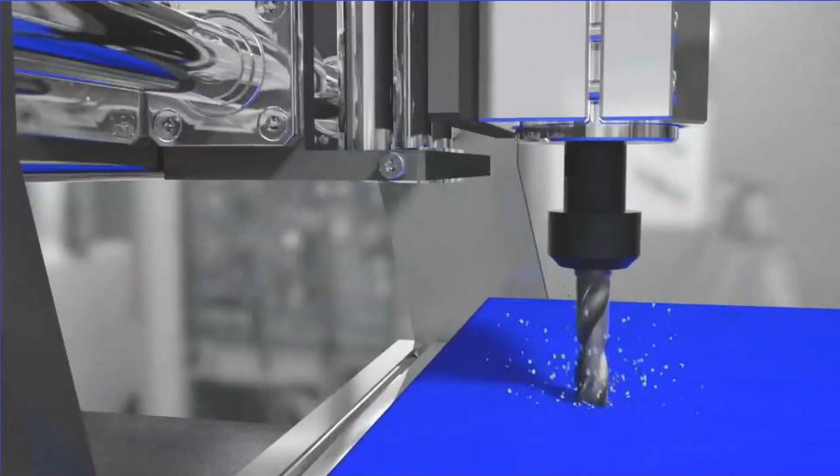I'm here to present Defeating Machining Challenges webinar number 3 with a focus on ToolConnect. The roadmap, really, I'm just going to give you a brief high-level PowerPoint of ToolConnect and its capabilities. Then I'm going to give you an on-machine demo. If I do have time, I want to mention one of our other products called SmartLight.

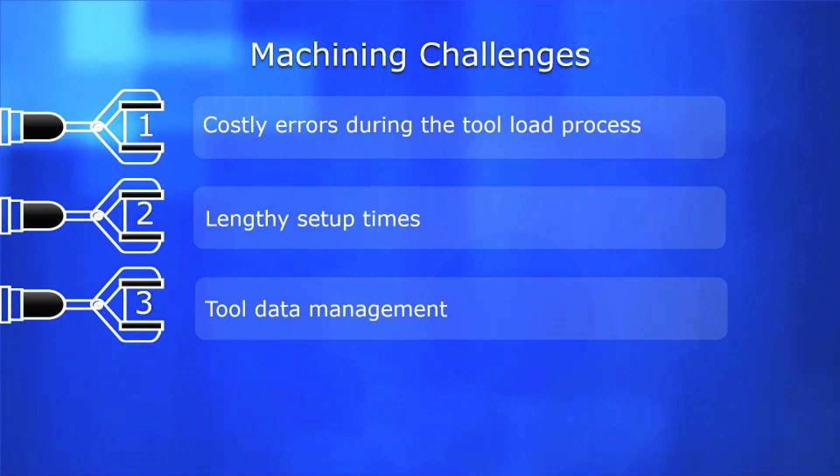So let's identify some machining challenges. Number 1, creating a tool load and unload procedure that is uniform to eliminate error. Number 2, we want to reduce excessive cycle time from on-machine tool measurement. In addition to that, we also want to eliminate costly errors during setup and optimize uptime of the machine. 3, tool data management, managing that tool data in and out of a centralized database from the machine.

And finally, our current climate. I mentioned this last week. What's next on the horizon with all of COVID-19 happening? Word on the street is reshoring is coming back to the United States. Manufacturing is coming back to the United States. The lowest entry point cost-wise to satisfy orders is for customers to optimize their current equipment.

Also, with these customers, did they have to let go of their skilled operators? What's it going to be like backfilling those positions? Relying on technology, intelligent solutions to keep machines up and running and error-proof the process is imperative.

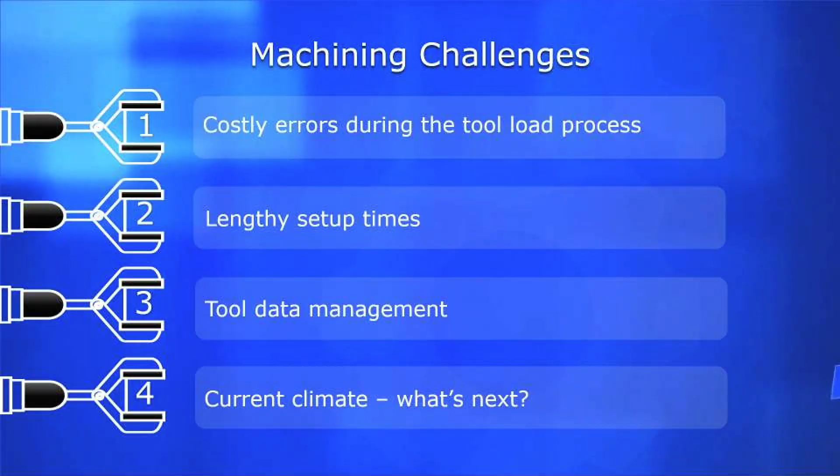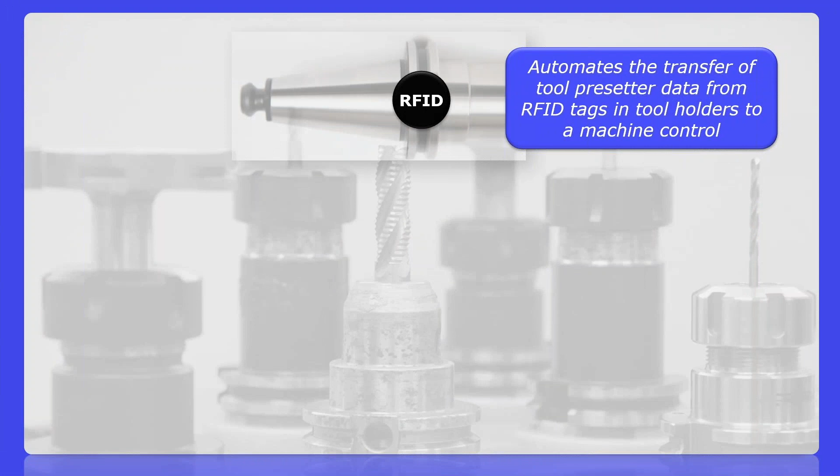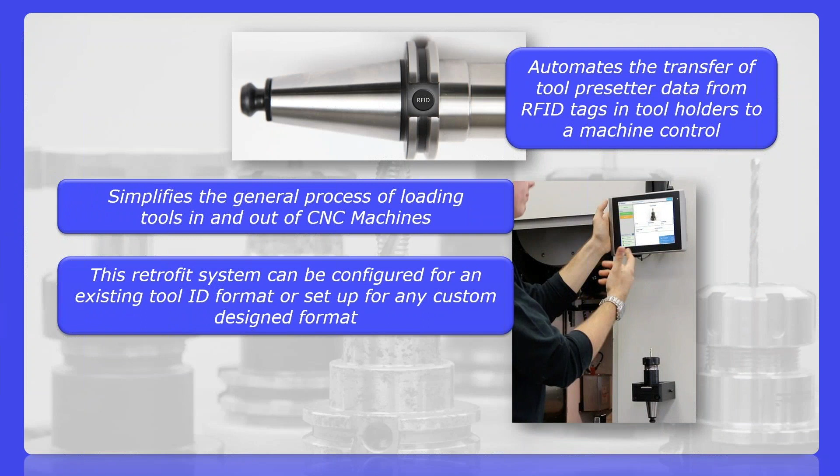I want to introduce the solution. ToolConnect is an RFID tool management and identification system. Really, all ToolConnect does is automate that transfer of data from the presetter to the machine tool controller, utilizing an RFID tag as the data carrier. It simplifies the general process of the loading of the tools in and out of the machine. It's a fully retrofittable system. It can be configured to match existing tool ID formats or set up for any custom design format.

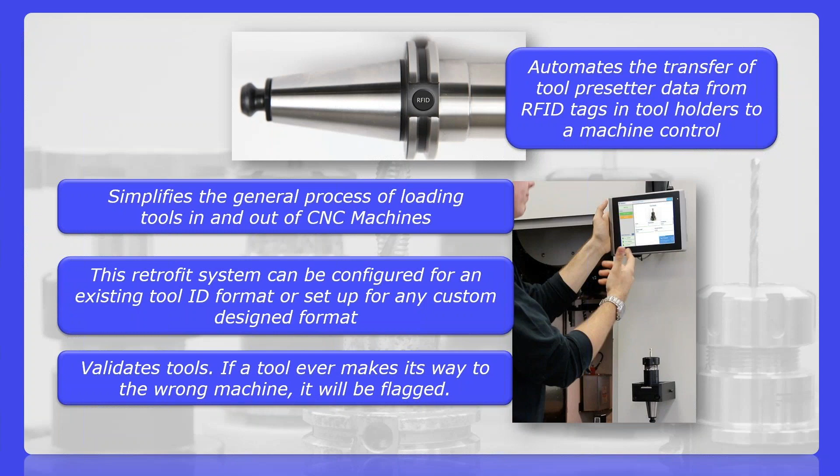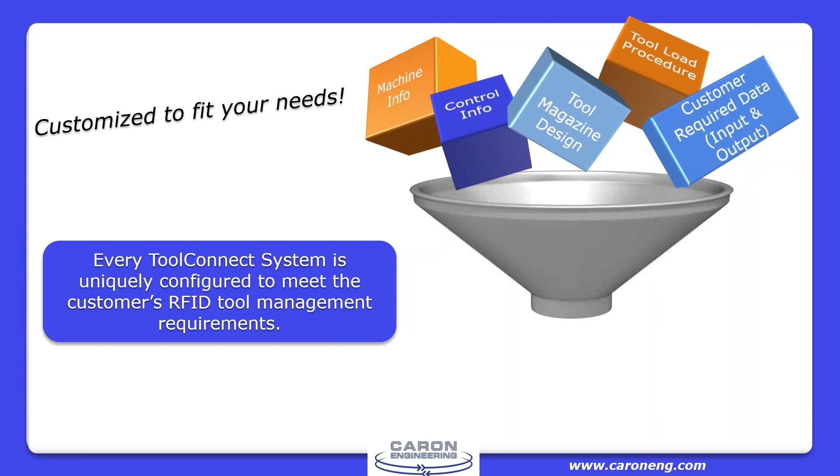Finally, it validates tools. So if the wrong tool is trying to be loaded into the machine, it will be flagged and prevented from going in. It's 100% customizable to fit your needs. So we compile machine info, control info, magazine type, tool load procedure, all these requirements of the customer on the tool load and unload procedure. We compile all this and we create a customized ToolConnect system for them. It's customized, but it's the same UI across all machine types. So now operators don't have to learn how to load tools in different types of machines.

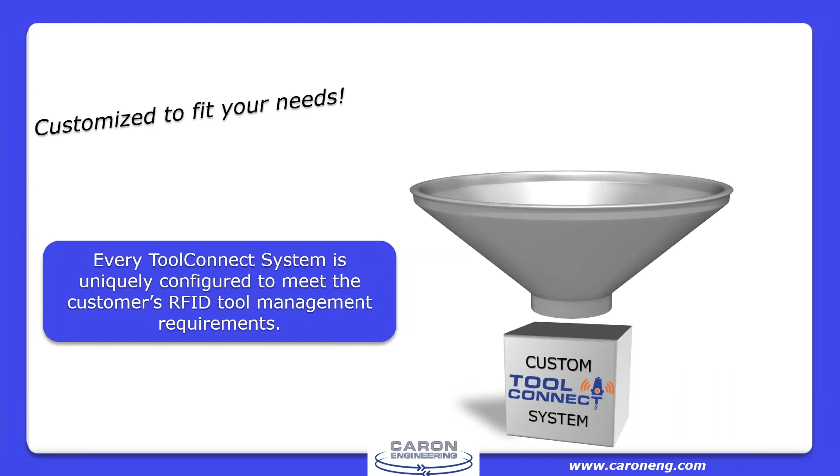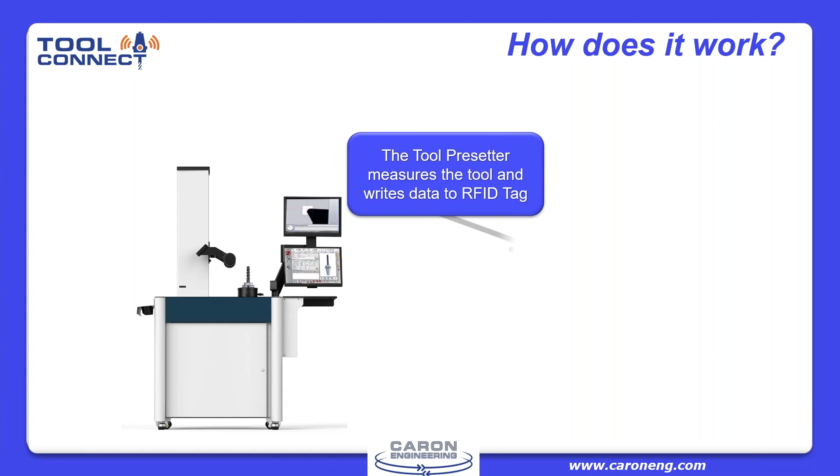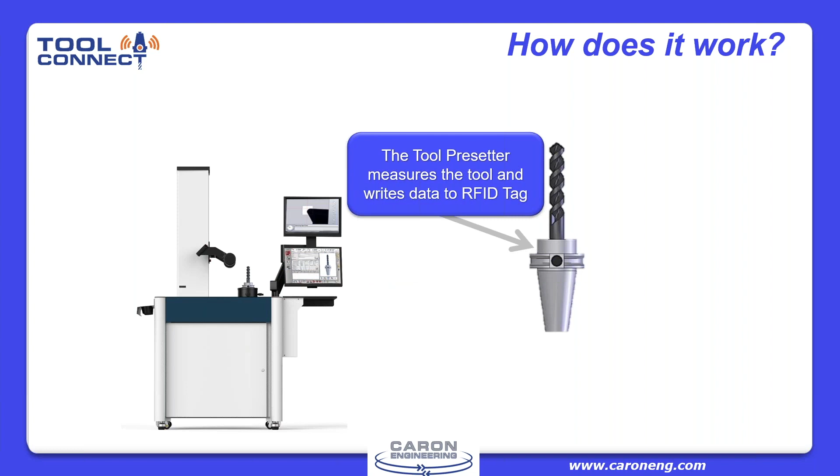So how does it work? First and foremost, you have to implement a tool presetter. Now the tool presetter measures the tool and writes all that data onto the RFID tag. Things like pull stud type, max RPM, tool too large for adjacent tools in the chain. You can get pretty elaborate with the type of information that goes on the tag.

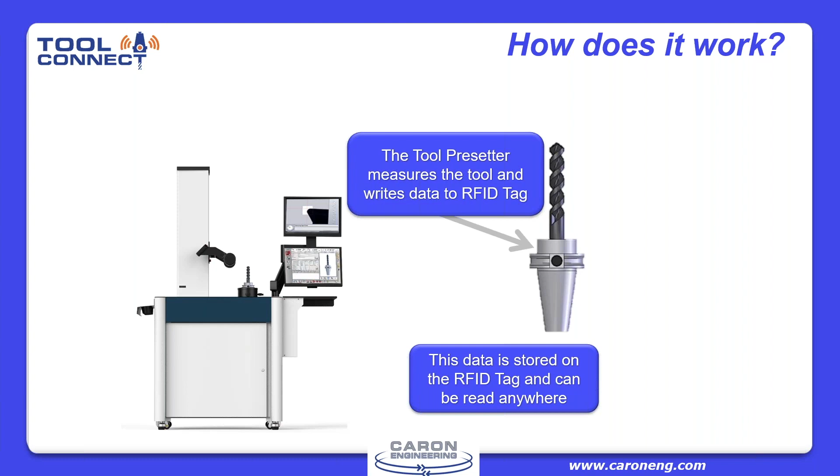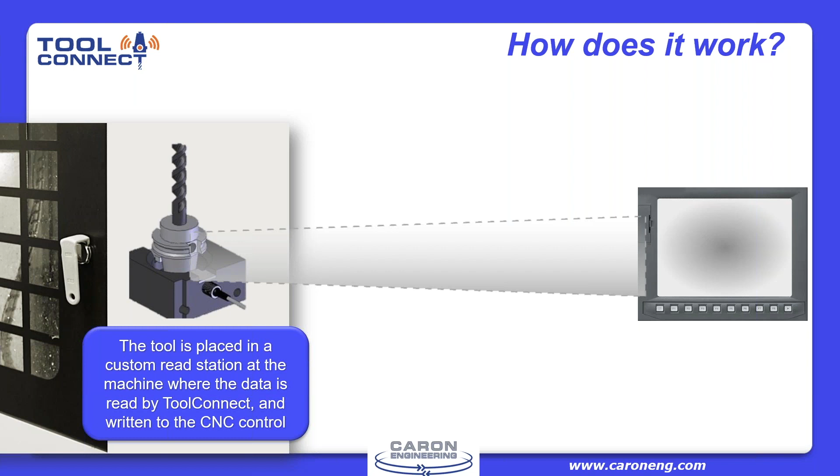Now, once that data is flashed to the tool, the data is stored and it can be read anywhere, any machine. So once that intelligent tool is placed in a custom read station, which is actually designed by us to accept that tool holder and present the RFID tag, the data then can be read by ToolConnect and written to the CNC control automatically. After you're done machining, ToolConnect tracks tools removed and updates tool life information to the tag. So your tool life, your tool wear offsets, the number of tool changes, etc.

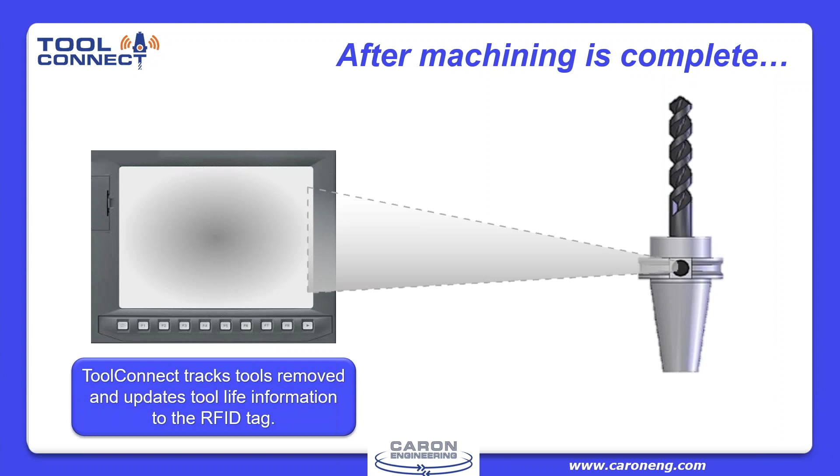So if the tool isn't used to completion, we can then take the tool out and load it into another machine. If the tool is at end of life, however, you then can take that data and plug that tool back into the presetter where there's an online repository, a database, and extract all that data off the tag. This is Industry 4.0. This is being able to culminate all of that data that you probably hadn't had the option or access to get before.

Here's our simple user interface that allows the operator to view all the tool and process information. Here's an example of some of the things that you can include: tool picture, ID and description, geometry, the status of the system, if you want to select an ATC location, and other user-defined custom features.

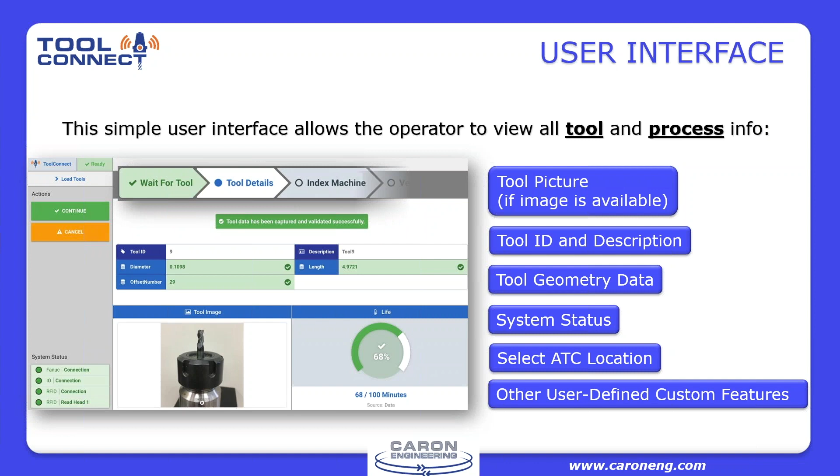Now, I'd like to go into our live demo. Mic check. Guys get that? Mic, checking the mic.

It's a good one. I want to start first by showing you our versatility of where we can mount the tag. In this example of this BT30 tooling, we actually put the 4mm RFID tag directly in the pull stud. In other examples, like this smaller tool, we actually are putting it in the keyway slot here. And yet a further example of that would be this HSK25 tool, where we actually put the RFID tag underneath the base of that.

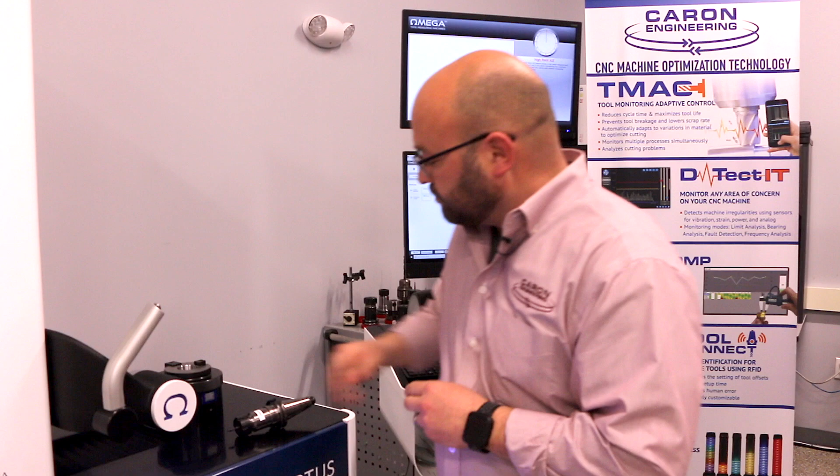What I'm trying to show you is that it's a versatile tool. It's a software and hardware solution that is truly customizable to the customer. A more common type of application and scenario would be on a Capto, for example, where the RFID tag goes into a milled out slot that most tool companies already have in there. So the RFID tag is in there.

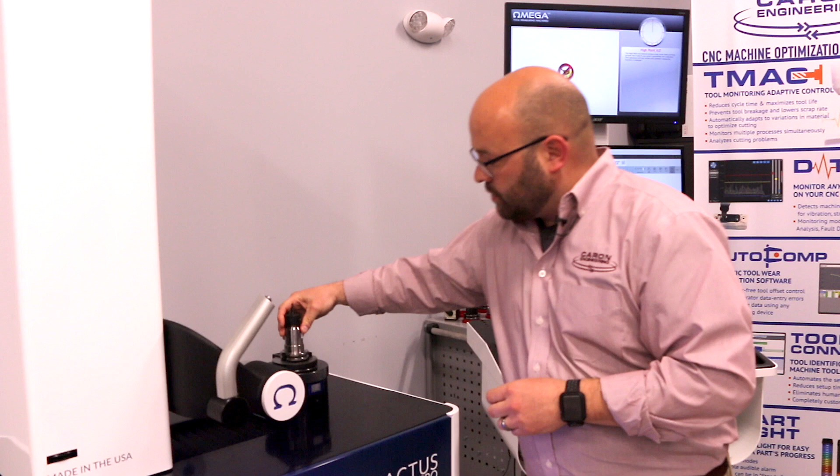Now what we're going to do is bring it over to the presetter. We're going to mount it in its position. I'm going to come over to the HMI, click Load, Tool RFID. A wand is going to present itself. It's going to train itself in, read the unique identifier on that particular tag, which is then going to tell the presetter how to measure that particular tool.

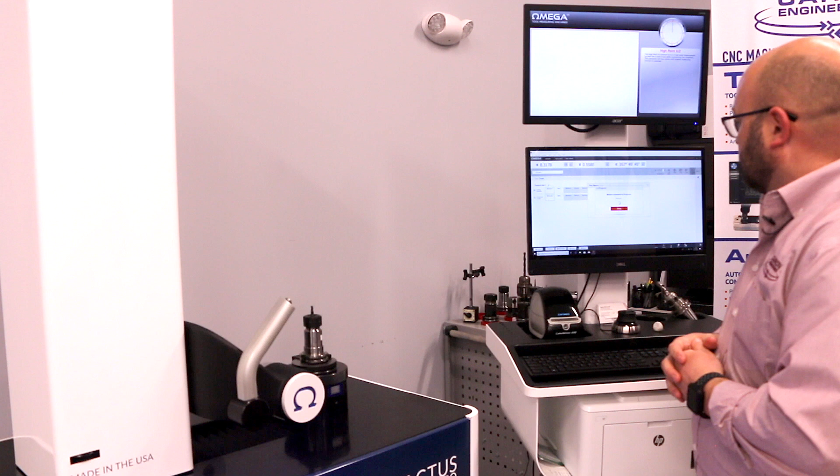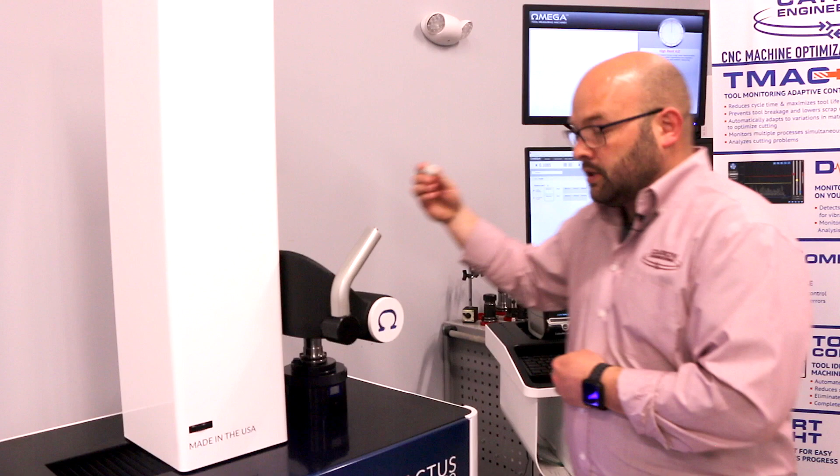So it's found the image of the tool. It's going to ask me to clean the tool. Even a dummy can do this, folks. Click OK. And now it's going to rotate the tool. It's going to measure all the flutes, radius, diameters, length. Once that's done, the wand will then come back into place. It will come in, it will flash all of that geometry onto the RFID tag, and now you have an intelligent tool.

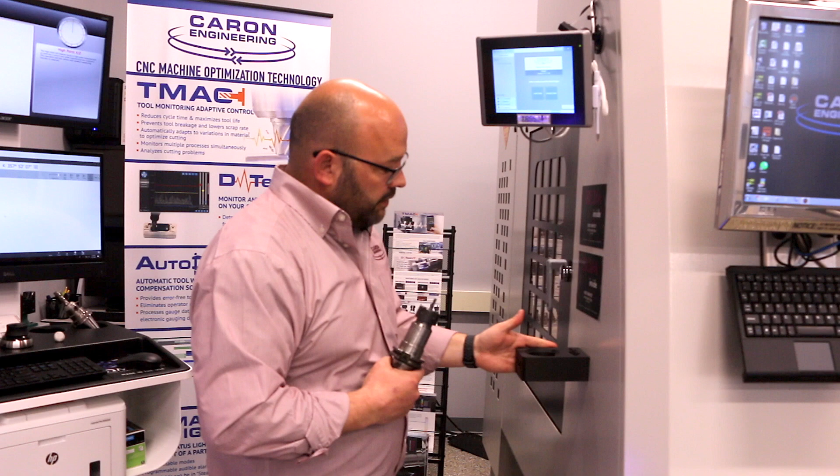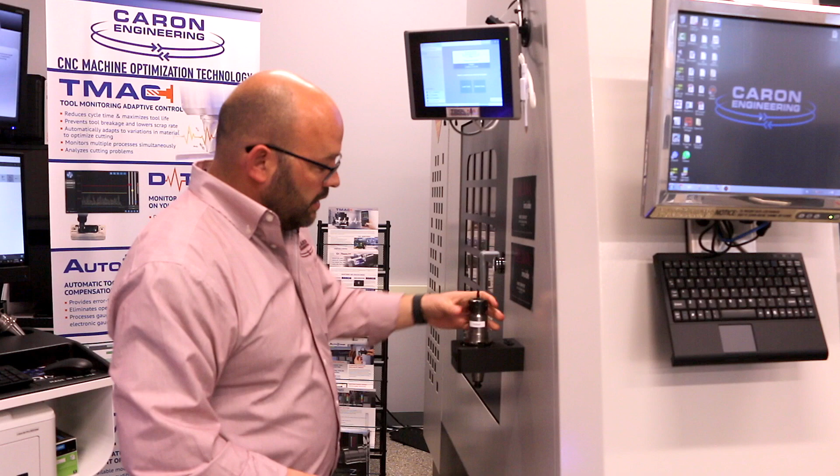I now take the tool out and then bring it over to our 3-axis mill. So here we have a tool pot that is customized to actually fit this particular type of tool holder. But I want to show you quickly that we have all different types for the smaller one. So really it's a way to present the RFID tag to the read-write head that's mounted inside the machine. So here I take tool 9. It only goes in one way in order to present that RFID tag.

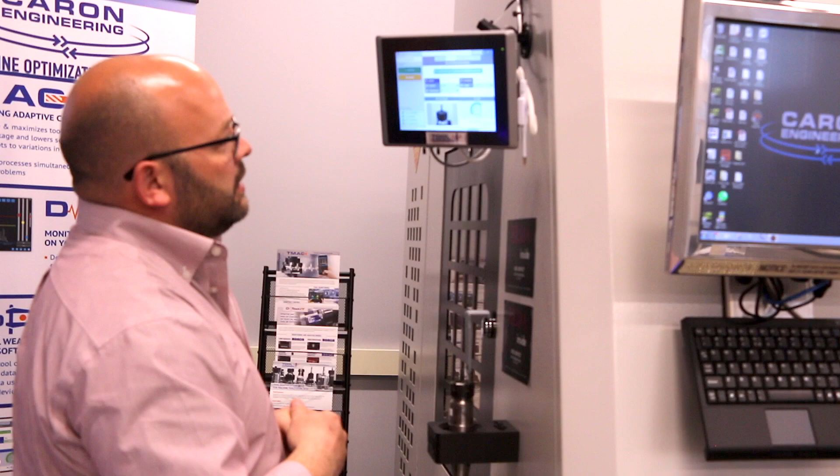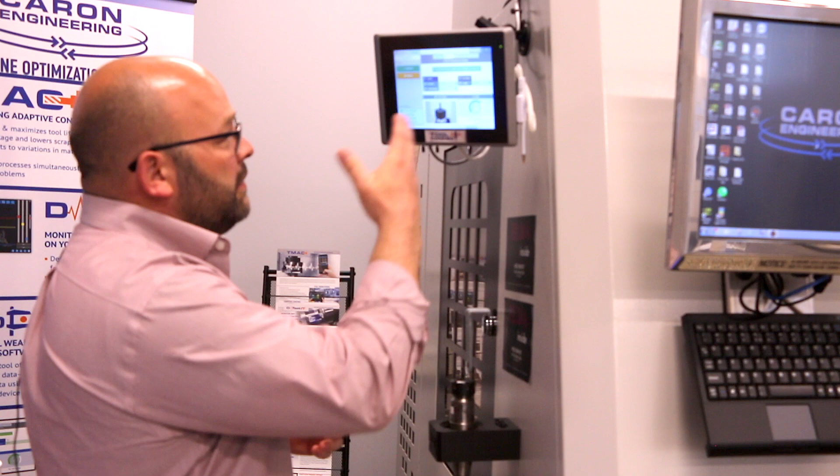Now I'm loading a tool. On our intelligent HMI screen, I'm going to click Load Tool. It's then going to step by step tell me what I need to do. So here you can see on the HMI a picture of the tool, life used of that particular tool, and then the necessary geometry information that is required. Me as an operator, I look at this and say, yep, that all looks good. I click Continue.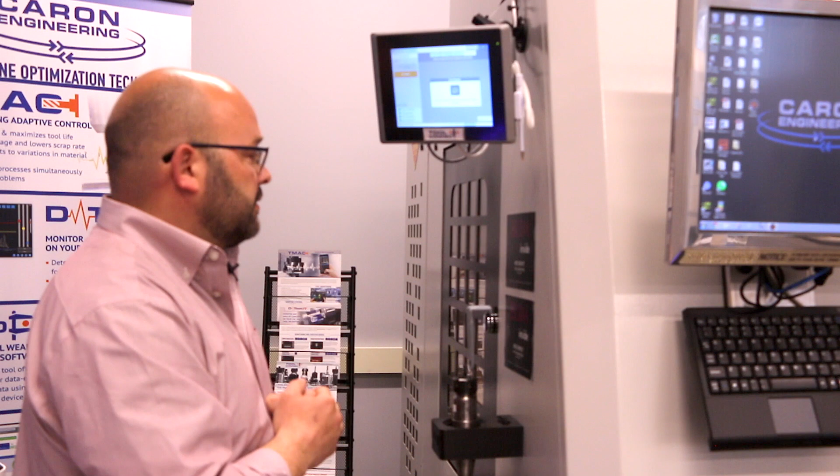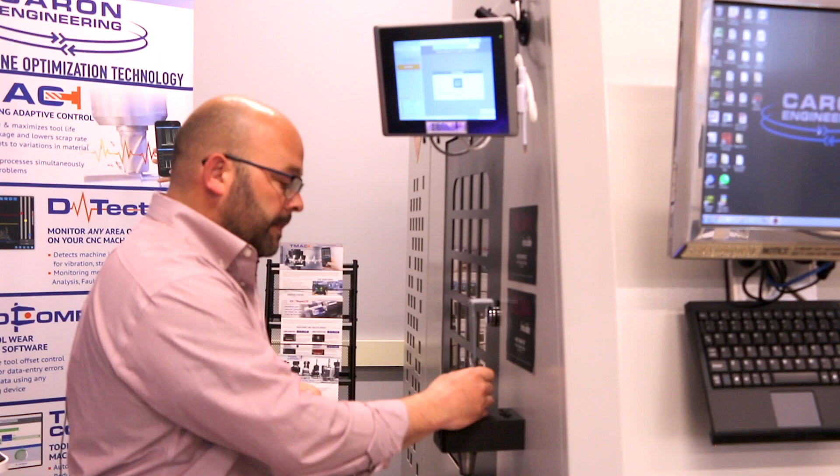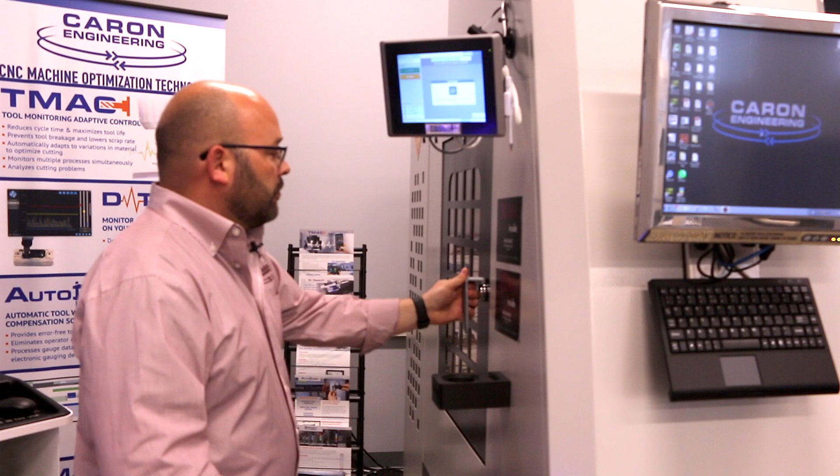There's a few things happening. The first is all of that geometry just went into the control instantaneously. Additional to that, the ATC of the machine is actually indexing to the proper tool load position. So now it's telling me that the tool is ready. I take the tool out of the tool pot, I open the door, and I lay it into the ATC. Now the tool has been loaded into the ATC. I click Continue. The transaction is complete. You're off and running, you're machining, you're cutting chips, making money.

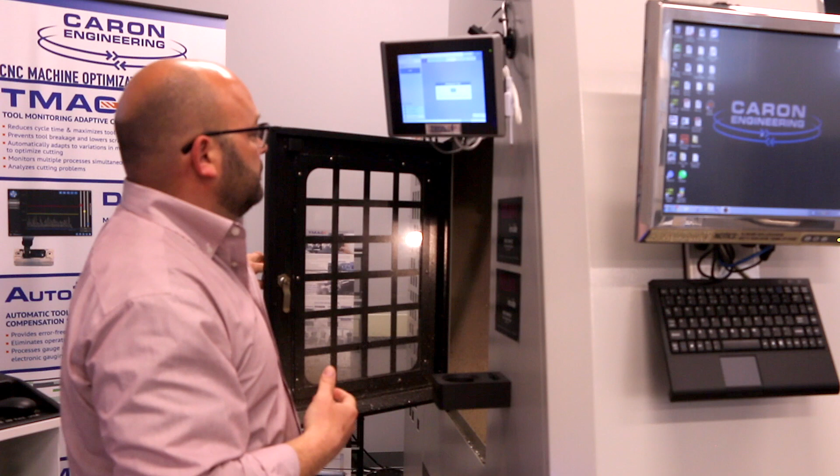Now it's time to pull that tool out. Here I'm going to unload the tool. First thing I have to do is identify which tool I need to pull out. I'm going to select tool 9, click Unload Tool. The ATC is going to index to the proper tool load removal. I'm going to pull it out. Close that door. Then push the tool back into the read pot.

That is the one. I'm going to click Continue. We've updated all of the work offsets, the life of the tool. So now a couple of things can happen. If there's still life on the tool, I can go to the next machine, pop it back in there in the same load procedure, and be off and running.

Or if it's at end of life, now I'm going to take this tool and I'm going to go back to the presetter, put it into the presetter. It's going to extract all that data off of that RFID tag. And then you as the customer can make some intelligent decisions on what you're doing with the data. How did that tool actually perform? Well, that concludes the live demo of ToolConnect. I'm going to wrap up here by hopping back into my presentation for the conclusion of the presentation.

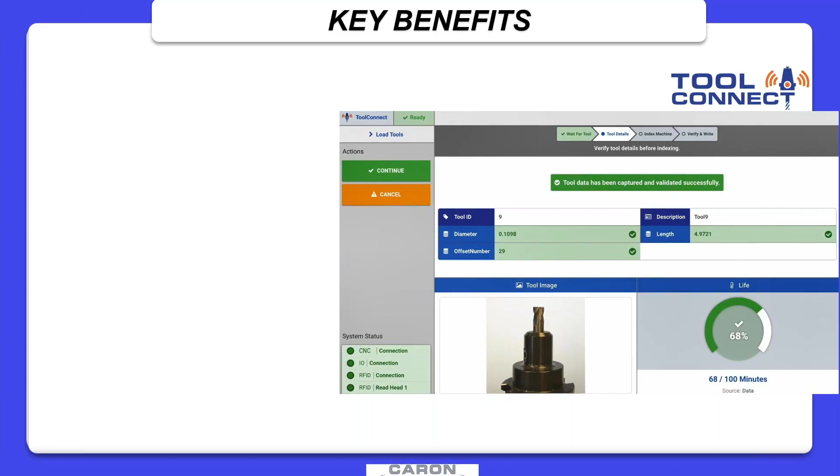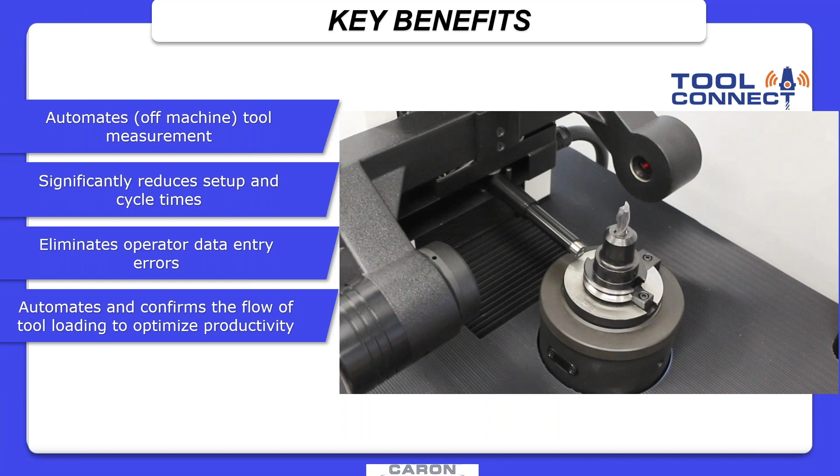So, I want to quickly discuss some key benefits of the ToolConnect product. It automates the off-machine tool measurement system. It's going to significantly reduce the setup and cycle times. We're going to get rid of the operator data entry errors inherently. We are also automating and confirming the flow of the tool loading to optimize productivity. Now you don't have operators running around trying to find the right tools and get them into the right machines. Finally, we're eliminating the need for a post-processor.

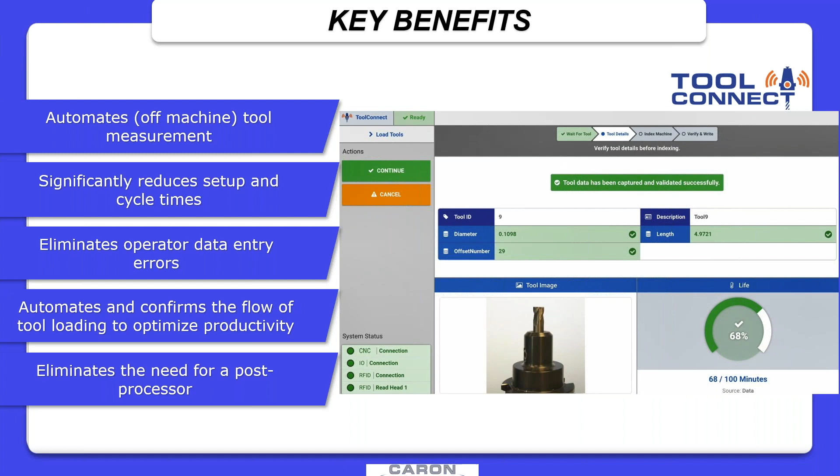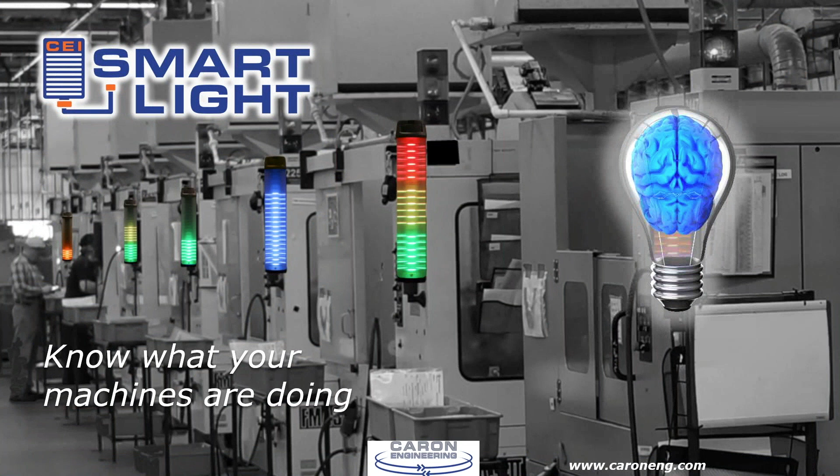So since I have a few more minutes, I also want to mention another solution of ours called SmartLight. The SmartLight is a visual representation of what's happening in your NC program. Instead of a traditional red, yellow, green light, we add additional granularity to your light stack. Now, an operator can view down a row of machines and see where to go next, instead of running around checking control screens.

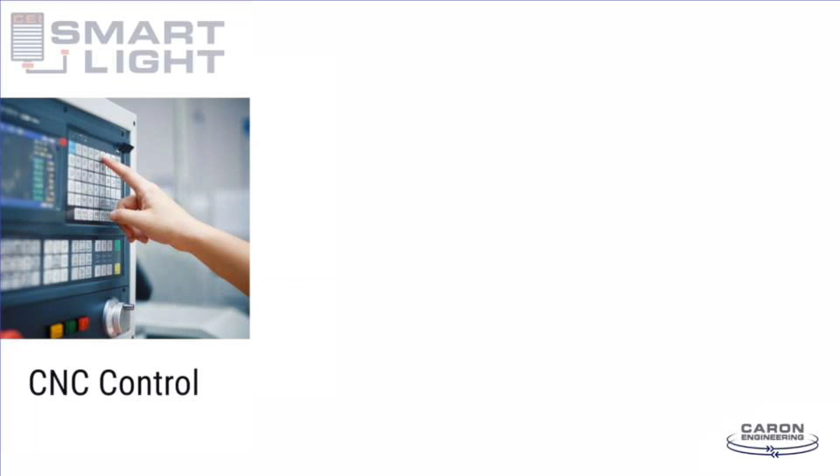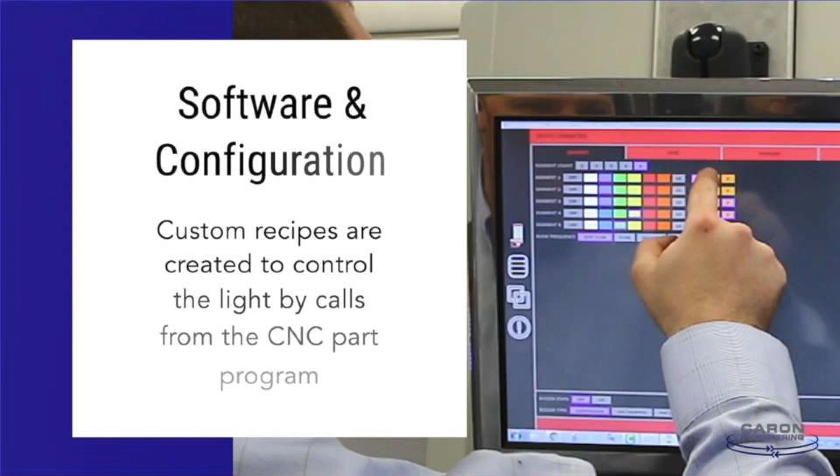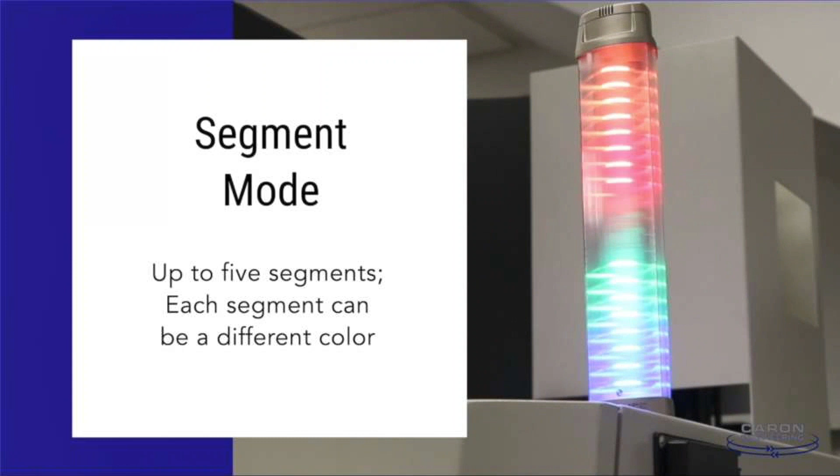The SmartLight is connected to the control via a CEI interface. Here is an example of our software and configuration screen where custom recipes are created to control the light by calls in the part program. There are multiple color options, 6 standard, plus 1 user-defined color. There are 3 modes that we can select. Up to 5 segments in the segment mode can indicate different light colors. Additionally, they can be solid, blink, or flash, or a combination of all 3.

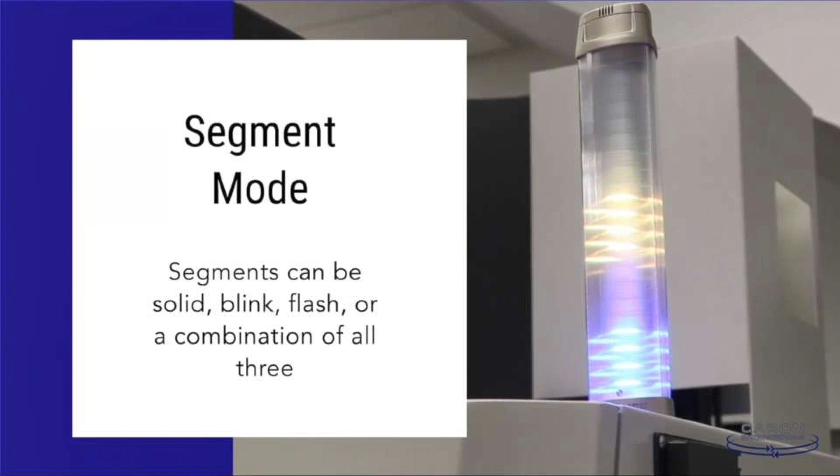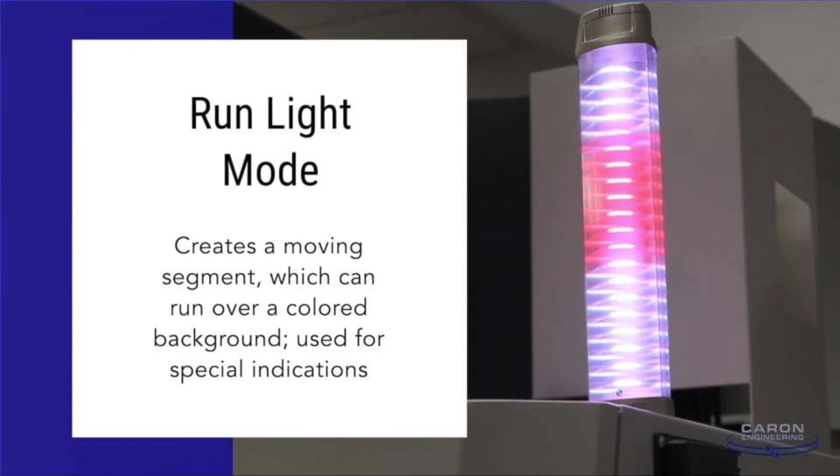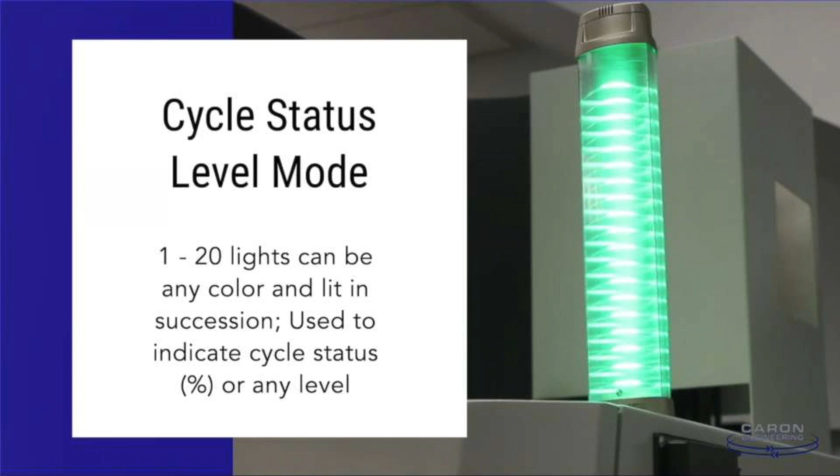Run light mode creates a moving segment over a run color in the background, and this is typically used for special indications. End of cycle, probe cycle, change a tool, whatever you need to grab attention. And then finally, cycle status level mode. Here, 1 to 20 lights can be lit in succession to indicate where you are in your part program.

So really, it's an intelligent solution that allows you to configure and alert your operators when a machine is stopped or something else is happening. It can be mounted anywhere on the machine. It can replace the existing stack light, or it can be added in addition to it. It has 20 LEDs. It has an annunciator at the top that's programmable to buzz, beep, that kind of thing, really get people's attention. It has 6 different colors, 1 user defined. If you want fuchsia to be your user color, you could do it.

I hope you found all this information that I presented today informative and helpful.